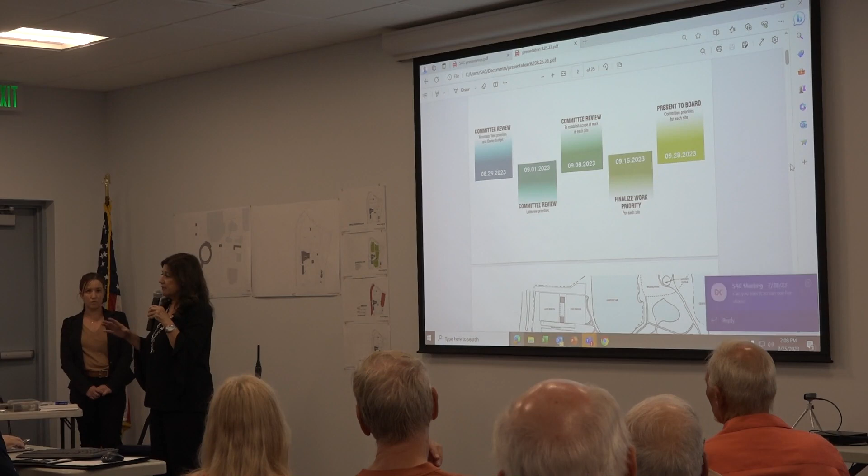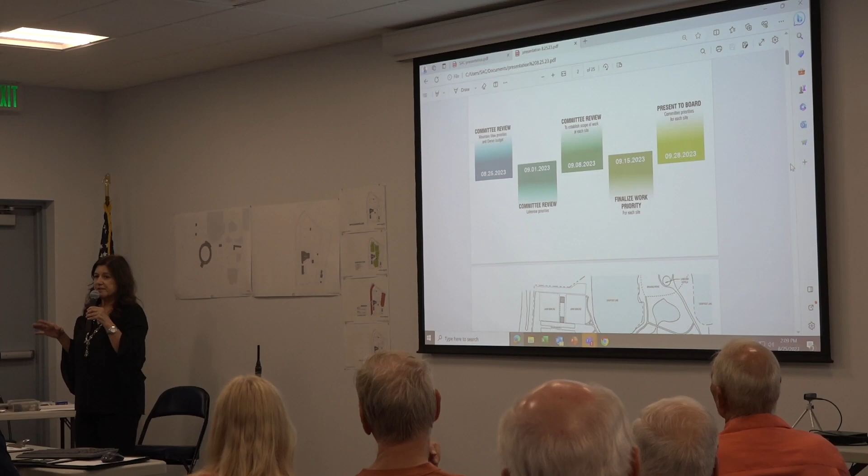Okay, so what we're going to do, this is an expedited process, folks. We have 2 different sites we're going to look at in terms of what wants to be done at each site in terms of the activities. There's going to be a wide range of potential for each. We've been asked to provide an overall site use plan that could show diagrammatically how the site could be modified, so then we can go to the board and see if there's an agreement to proceed in a particular direction. So today, we're going to go through briefly the 2 sites and then focus today on Mountain View. Next week, we'll be focusing on Lakeview in terms of alternatives and potential direction. Then the following week, we will come together to decide amongst them what is the priorities that can be done at each site that provide what you want and you're comfortable with assigning to a particular site or to both sites, okay? The idea would be then we'll do some general budget numbers, so then we will go with a preliminary site use diagram to the board on the 28th to see if there's consensus about an overall direction for just basic site use definition. Okay, so with that, what I'd like to know is, do any of you have any questions on that process?

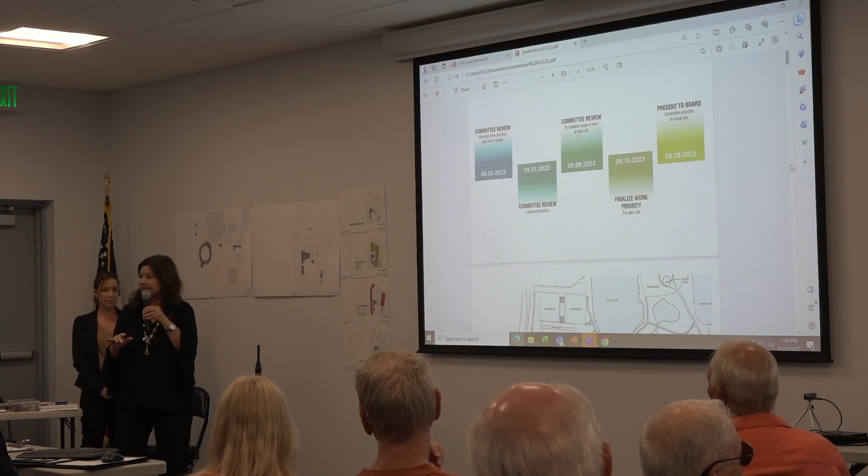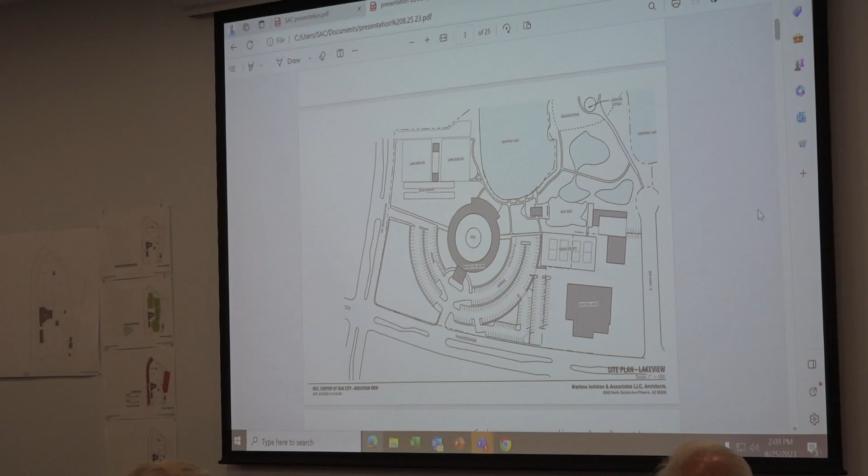Okay, so this is Lakeview, obviously, and what we're doing is we've done a preliminary evaluation of the buildings in square footage. I'll just tell you in general, there's not an issue with overall parking accommodation or anything on either site, so I'm not going to go into that in any detail today, okay? Next slide. So Lakeview has these primary outdoor activity spaces, as you know: swimming, tennis, shuffleboard, lawn bowling, and mini golf. Next.

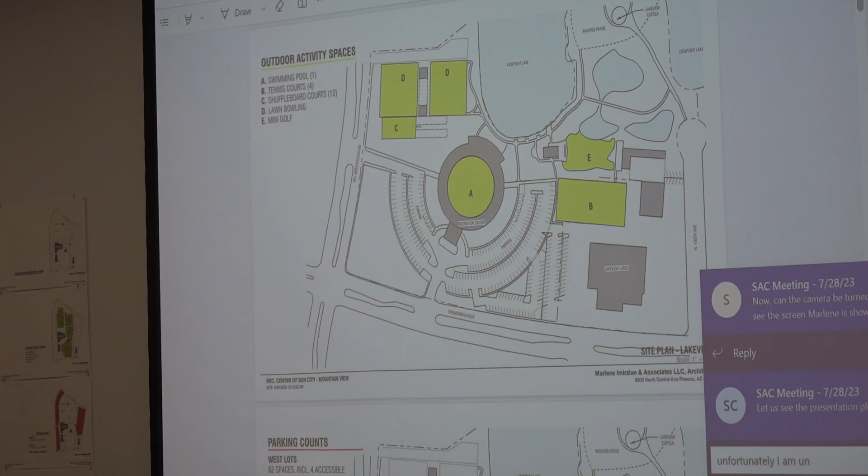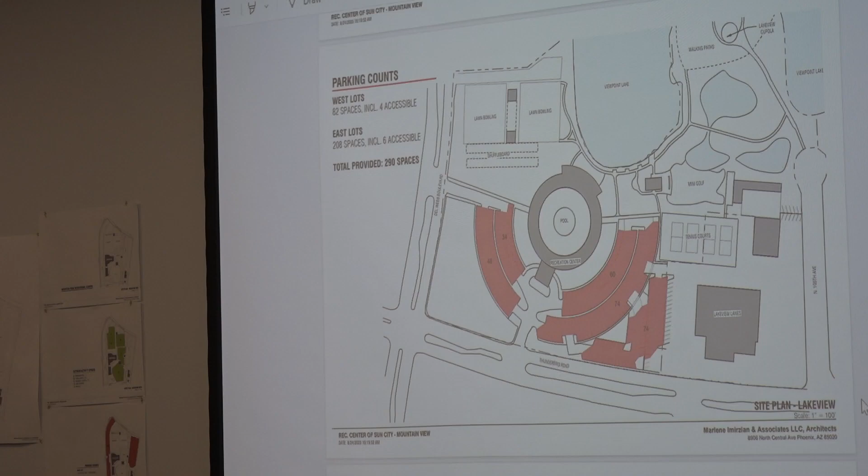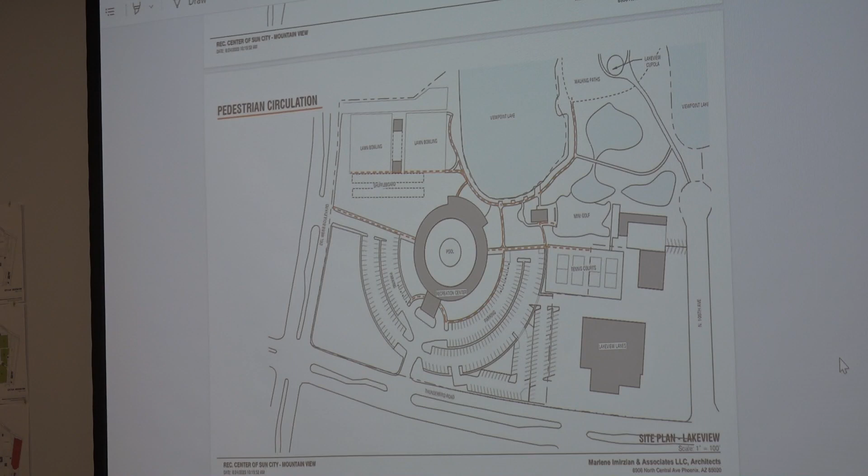The pedestrian circulation is fairly clear, and one of the best features here is Viewpoint Lake, which right now probably isn't optimized. It's a really fantastic place. When I went there I was saying, wow, we could do so much with this, and even some minor new construction would do a lot to really optimize that wonderful site.

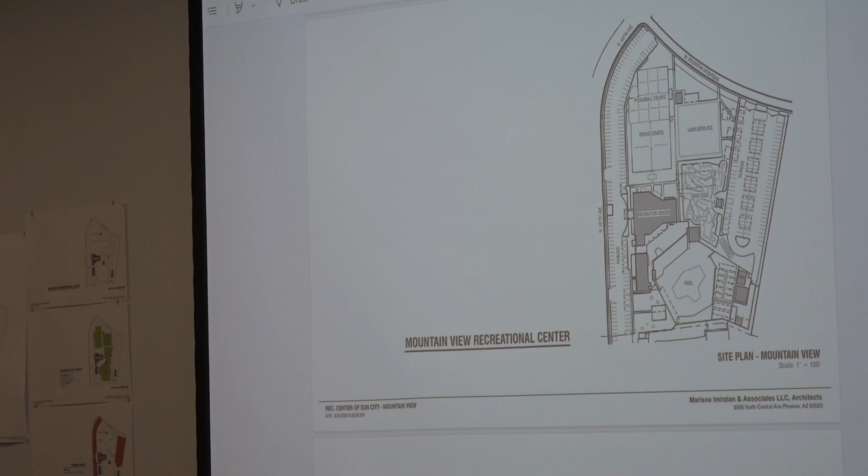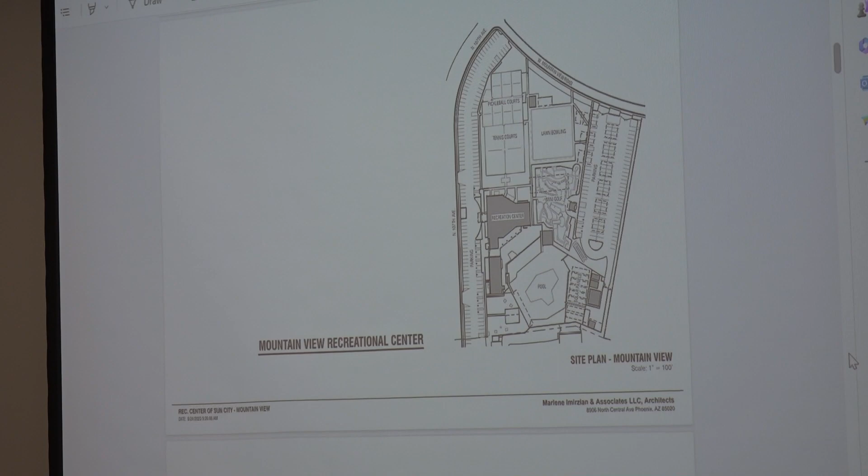Mountain View is one of the smaller sites, and it's pretty much fully utilized. Here you see the primary buildings, the two buildings in the auditorium shape, and then the area with the fitness and the restrooms.

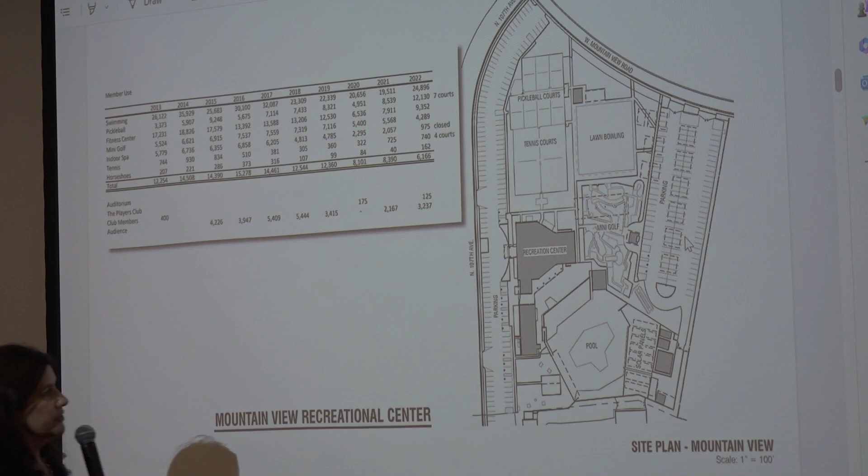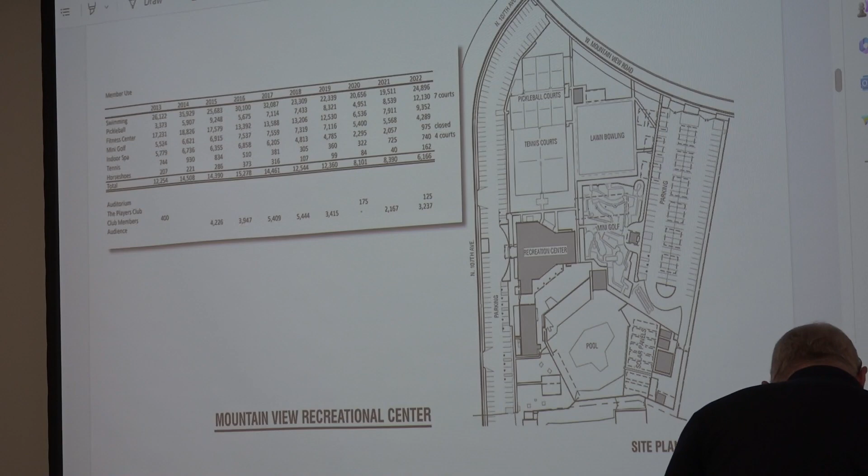Can you make the screen bigger, or make the image bigger? Thank you. Okay, so these are the two primary sections. I don't have a laser yet. Somebody does, you will shortly, they can figure out how to turn it on. I actually don't mind pointing, if you guys don't mind that weird light in my face.

So here are the two primary buildings. For a site of this size and this activity, there's a relatively small area for the restrooms and showers, and for the fitness area.

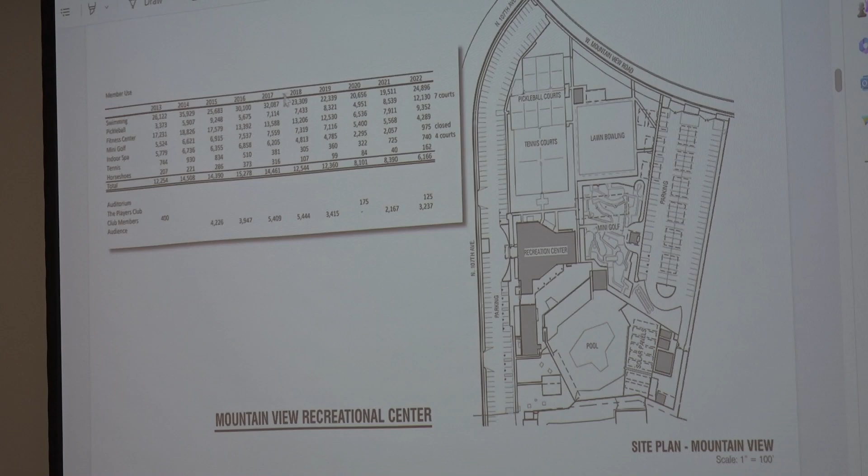Let's go to the next slide. There you go, this button there. Yeah, I know, sorry guys, it's the best I can do.

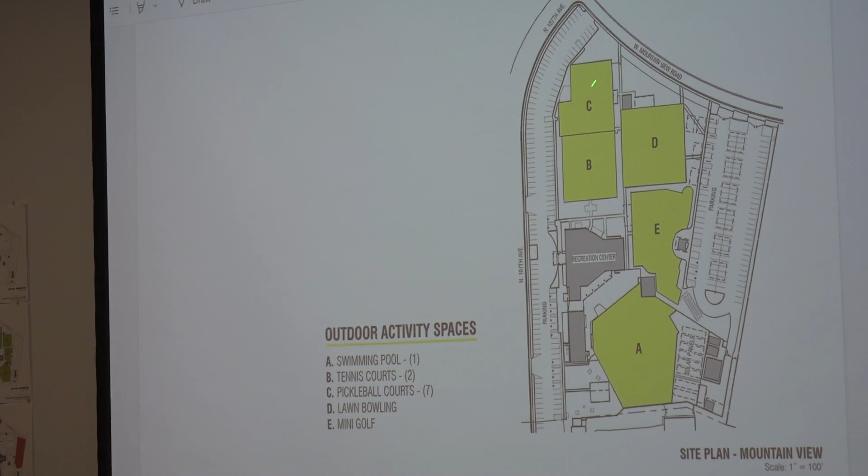Outdoor activity areas are primary at this site. There is swimming, a very generous pool area around it, the tennis courts which are B here, pickleball courts, lawn bowling, and mini golf.

Parking on the perimeter allows for that central focus for all the activities, which is actually pretty nice, so you're not crossing parking to connect to different activities.

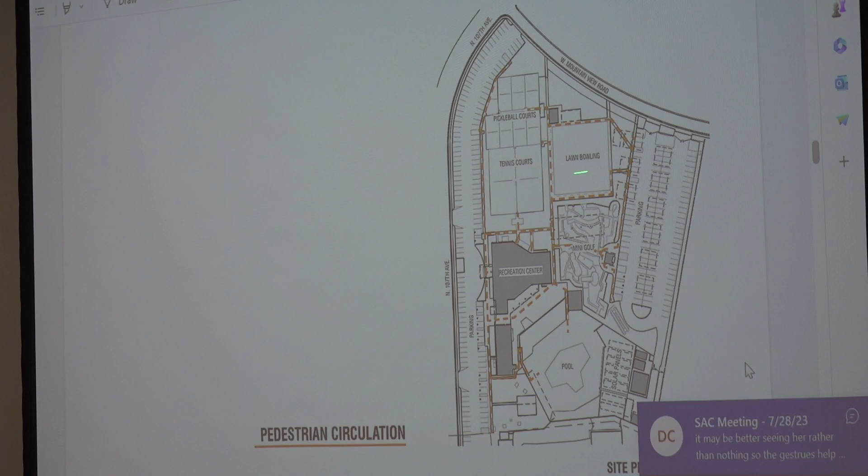The circulation, this is the main front entryway, is fairly clear. There are some areas here that I think have a lot of potential right now, but they're fairly open and not very well developed. So there's a lot of potential even with what you've got right now at Mountain View.

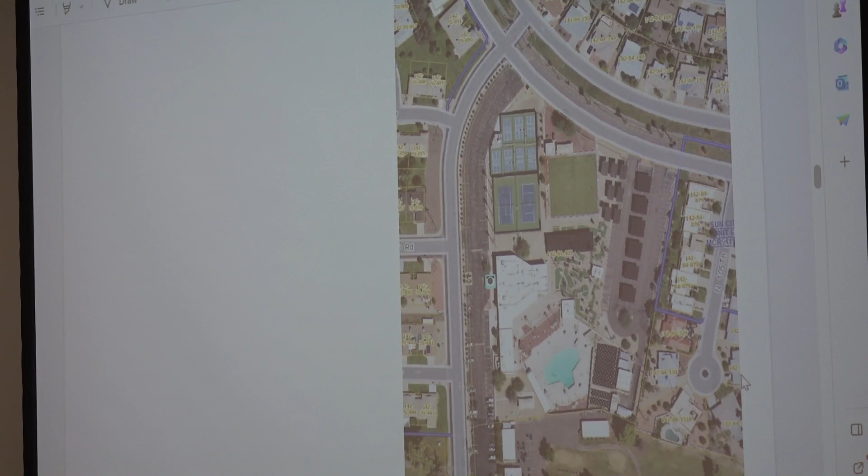Here's Mountain View overall, and here's the view of the buildings.

So like I said, today we're going to focus on Mountain View and see if we can establish what priorities could fit and work optimally at Mountain View. What I'm starting with right now is your existing buildings. Who loves this building?

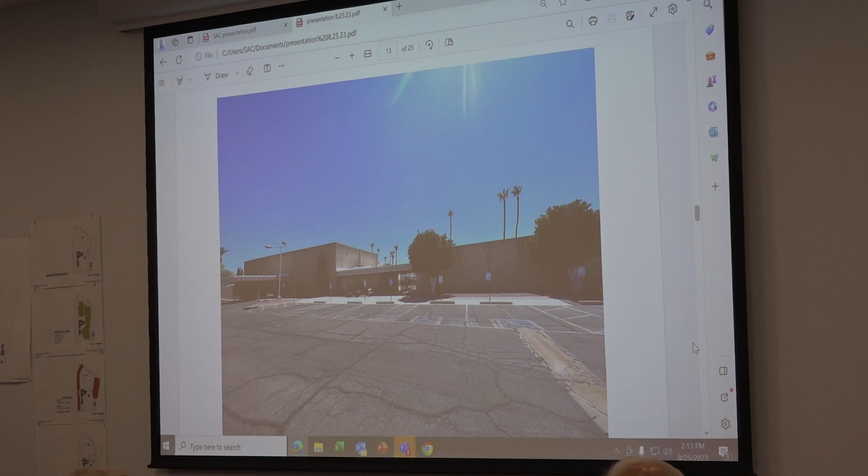If we kind of fix it a little bit, tell me what you like the most about this building. I love the architecture of it and the history and quality of Sun City. Okay, so it's like a historic element.

So would you be open to adjusting it for current uses and to optimize it in terms of some daylighting and alternatives? Sure, as long as you kind of kept the feeling of the building.

Like a little geometric—can you speak up? As long as, architecturally, when you pull up you see the entranceway and all the little shapes and structures of the building—to me it speaks to the history of Sun City. So if you could maintain some of that, where maybe you came through it and opened to a courtyard or whatever, I wouldn't be opposed to it, but the idea of just tearing that whole building down doesn't work for me.

Since the microphone is here, I don't have a particular fondness for the shape of the building or the historical element, but I think I'd like to see it potentially refreshed and renewed and used rather than torn down.

My perspective is one of the best things we can do overall is to keep an existing building and see if modifications can be done to optimize how it works, while still doing a major upgrade that can look different but respect the history of the location. That's very common in our practice, and we have a lot of past projects with old sites and buildings. Part of what we show is how we can optimize what's there, potentially rebuild portions, but not start over.

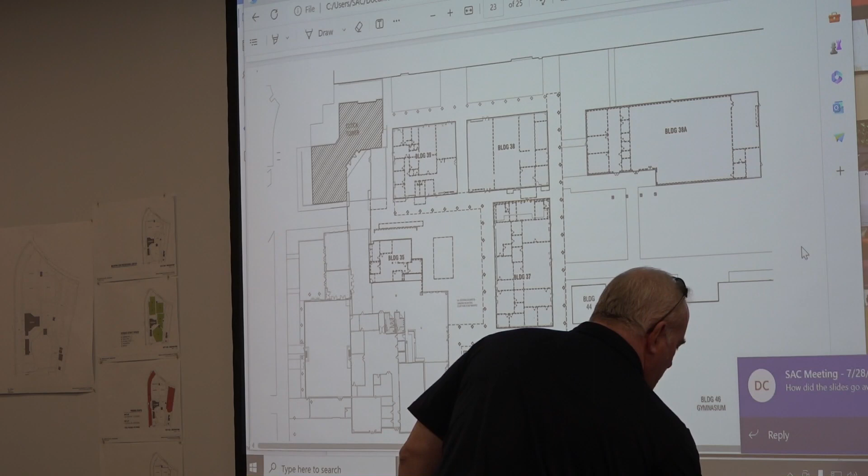Okay, next. Okay, can you go to the next slide? I want to talk about something else before we go to that slide about what you want. Sometimes people wonder, okay, what can you really do with an older building? Can you really update it? Steve, here, I'll hold it - you need to come over here so they can see the slides still.

This is a very complicated existing building at a community college here in Arizona, Mesa Community College. It is 7 buildings. They had very little budget. They had a lot of small, tight spaces that functioned very poorly. There was a lot of problems with shared spaces and collaboration. I'm only showing this quickly as an example of how you can go in and evaluate what we can do with existing land and space, and improve how it works in a cost-effective manner that optimizes how you work.

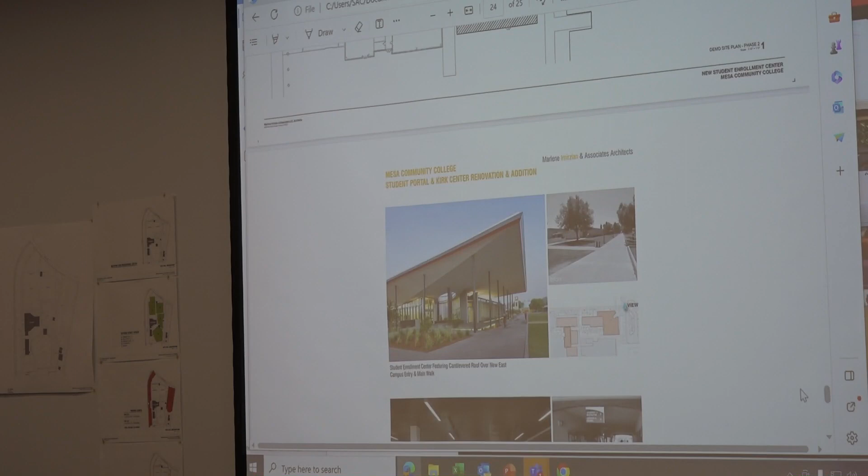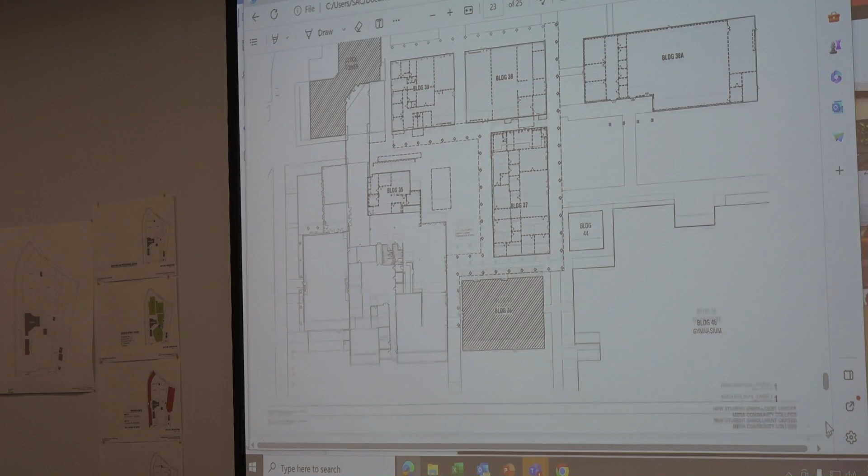Okay, next. So, actually go back one. What I want to say is these are all the existing buildings, all masonry, and there were these exterior courts. There was no real visual way that you could see where you're going to go into. All these areas were highly closed in and not of a size that could be used very well between the functions. This is for the student center, gathering space, study spaces, etc. at Mesa Community College. You know about that? Okay, next. Okay, so just a couple things to show.

Here's the site plan with the area of it. Part of what we did is at the very front, we made the new entrance and student center with a visible welcoming element that creates the main visual entry point to the campus from the parking lot, where there was none.

This is what it looked like before. When you came to the campus before, it didn't really look like you were entering the campus—it looked like you were at the back door. So the idea was, how do we create a welcoming place? Keep in mind, nothing here is saying we want to do this for your project. I'm just giving you a quick example of a very difficult, low-budget project, with existing buildings and very limited new construction.

This is how the buildings looked when we went there—small masonry buildings closed in with some exterior circulation between them. What we did, very economically, was open that all up with a whole new connection point. So now what used to be two small buildings is one more flexible building with a much better ceiling space, and all new utilities, services, electric, and communication.

Next. Next—it's the same one, huh? That's it, we're at the end. Oh, that's the last one. Okay, so just a couple examples.

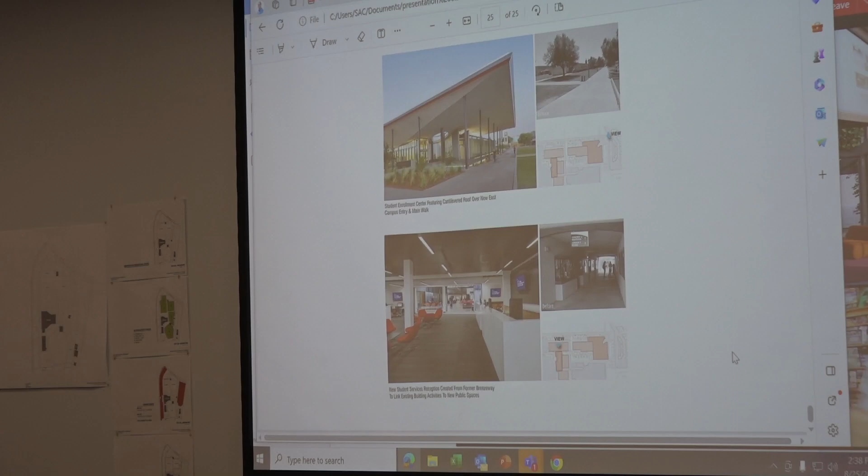So we have a lot of experience with existing campuses. Let's go and start now in one of our conversations about what we'd like to do. Can we go two slides up?

Okay, so we've been told these are kind of the numbers about what's happening right now on campus. Before I go further, based on what I've said so far, does anybody want to make a comment or suggestion about what we've talked about?

Yes? How would you go about establishing that the building can be renovated? It can be renovated? Yes, you know—yes, okay, so here's the thing, folks.

There are three key elements—I didn't bring those in. Anyway, structure and systems. Right now we would do an actual full structural evaluation of each building before we tell you for sure everything is fine. We have walked the buildings in general, and there's no evidence of structural failure.

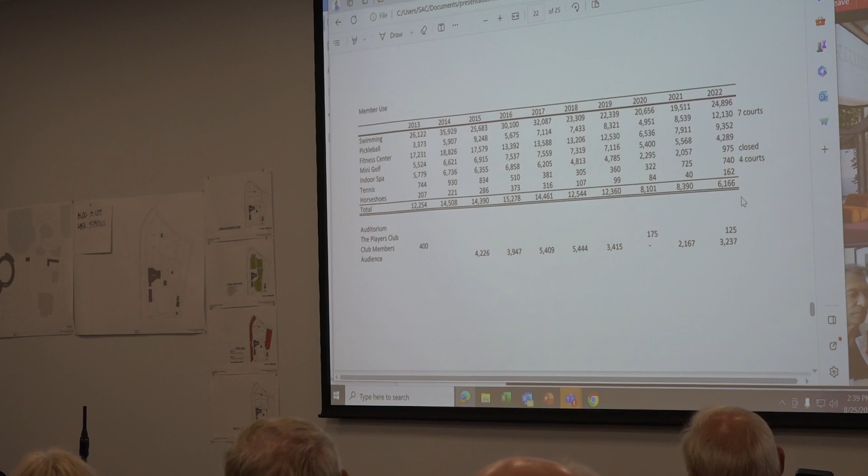Folks, that's the first thing we want to look at—are we even talking about something that's worth saving at all? That's number one. And even if a building is worth saving, if the dimensions, proportions, and use are just not of a size that merits saving and compromising how you might build new, that's also something we would not recommend. Right now, that second building is quite small and quite problematic in terms of proportions, services, and uses.

Yes? I just have one question—on the main auditorium, we were told it had asbestos in it and was probably just not worth saving. Can you address that? Is that part of this, the structure question? Okay, so asbestos abatement is very common in every building of this period. That is not a predeterminant for not doing it—you empty the building, get a whole team together, and get rid of it one time.

Okay, thank you. How about the flat roof—is it in condition that it should be saved, or would you rip that out? So I haven't been on the roof, but we would go up and see what the condition is. Are you having evidence of leaks from the roof right now? Yes, from the auditorium roof. What happens a lot with roofs is there's poor overall maintenance and upkeep in terms of the roof's condition. Usually, unless there is a structural problem, that's fairly easy to adjust—it's one of the key things we'd need to evaluate at the beginning to see the condition. Did that answer your question?

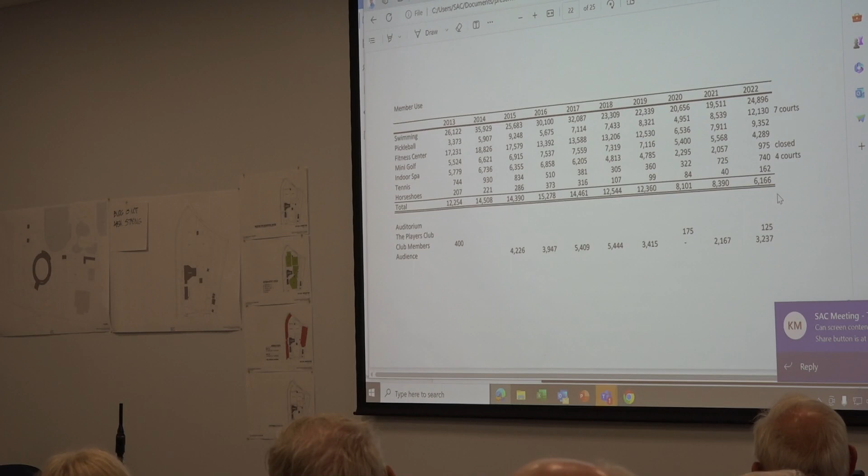Not as existing. I did see that, thank you. Okay, can't do it? No. Thank you. What's the problem?

Okay, regarding the 'not as existing,' what does that mean to you? We as a committee had voted earlier about Mountain View, where 2 pools would be. There were options presented, and we wanted a resort pool and a sports pool that would accommodate volleyball and accommodate lanes.

I think that's what the committee had accepted and agreed upon before. Presented. Okay, so what I heard is swimming is a priority with 2 main functions. Is that correct? Did I get it right?

Yes, and to add to that, the large pool would also be for aqua fitness. We have a huge amount of attendance for aqua fitness, that's why the pool dimensions would be important. Is that the sport size or the resort size? No, it'd be the resort one, for aqua fitness. There were 3 pools before, not 2.

That's what I was going to bring up, but also we would need bars on the pools because some of our classes involve holding on to the bars. No problem, yeah.

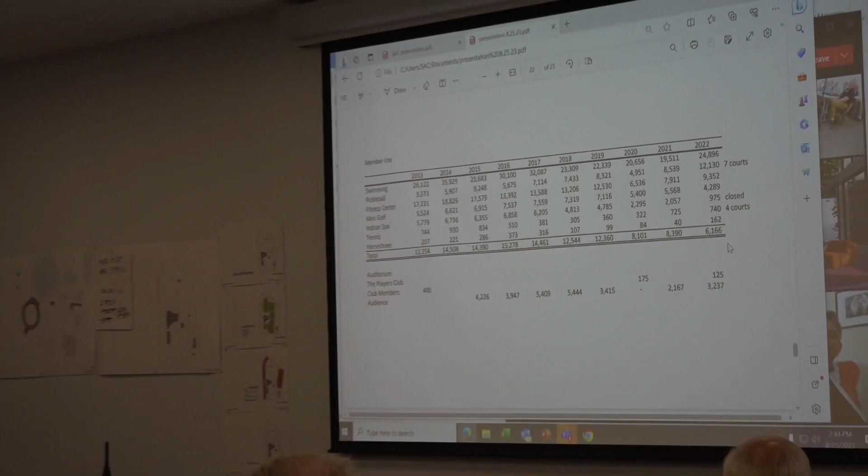Okay, and then what are the things you wanted to add at Oakmont? We'd like some shaded areas, or maybe some kind of sunscreen, because the sun's a problem certain times of the year given the way the courts are situated.

The courts are situated about as best as they can be when you consider the year-round factor of the sun. Okay. But if we had some shaded areas, some patio furniture, some storage, little things like that, because it's got the jacuzzi, the locker rooms right there, and an auditorium. It's a nice little place, and the people that work there are fantastic.

And I'm not saying they're not fantastic anywhere else, it's just that we love being there. Yes, you can check this up there.

The multi-purpose auditorium will cover volleyball, basketball, pickleball, and a fitness area inside. It'll cover a lot of different clubs, not just one, which it should not be used for. No, nothing should be used for just one club.

Okay, do you mind if I go one by one? Please. Okay, yes. Where we got down to 2 pools was because the lap swimmers didn't have a regulation lap pool - the pools they have have curved ends, or aren't the right depth, or whatever.

So we said, okay, we can do the lap pool, maybe 2 or 3 lanes, but that pool should also be constructed in a way that if water volleyball explodes, it could be used as a water volleyball pool as well. That's how we got to 2 pools. Does that make sense?

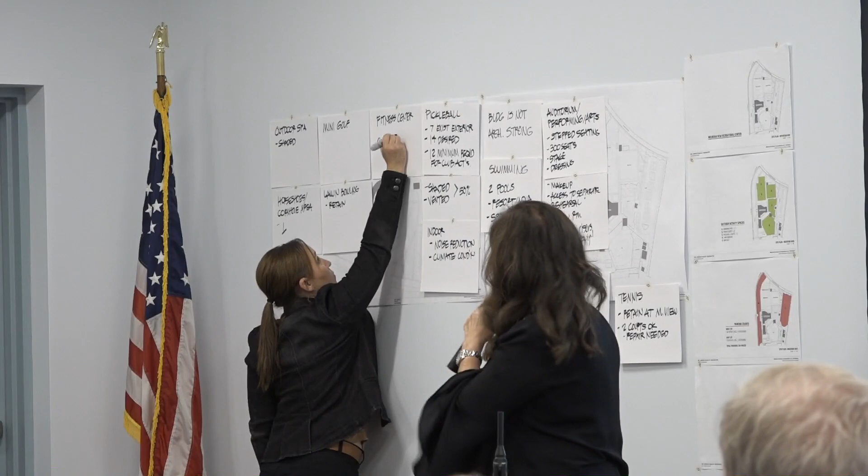Okay, just to give you a sense of scale. Would it be about the size of this room? It'll be bigger than this, proportionally this is too narrow, so the proportions and stuff are also very important. Okay, about double.

I think we decided there's no pickleball, right? I can't resist, I shouldn't do that, but okay. So you're going to do it on the softball. Pickleball, we're going to do, and we're going to look at 12 minimum. Then when we look at the spacing, it will allow for structure to be around it, so the site placement would allow for that to be done. And then if we're thinking about structure, we also have to think about the areas around it, so that we're allowing for clearances if we need to for code, okay?

The other thing about once we build a structure, then parking is required, okay? Right now you've got some good parking proportions, but once we take a look at what we're adding, we'll take a look at what the impact is.

Swimming, yes, two pools, a resort fitness pool and a sport pool with lane and sport capability. The other ones are just characteristics of those two pools, not another pool. There's potential for shade, and a potential for a 3-lane lap pool as part of one of those two pools, the sport lane and sport pool. Make sense? It's an aqua fitness.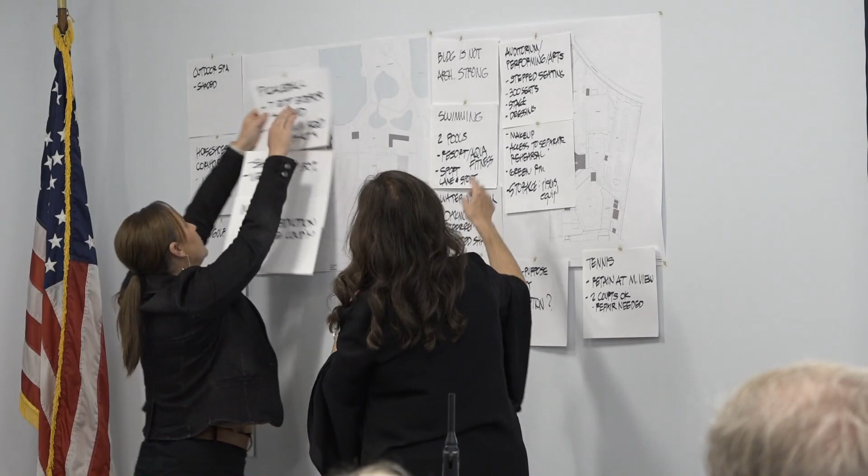Okay, and then I got the sense that swimming with 2 pools, we'll have to decide size of these, okay? Yep. But that existing pool is not going to remain, correct? Why not? Yeah, it's too- okay, I'll look at it, but proportionally it didn't look good for what you're talking about, that's the only reason. The shape and wasted space.

So the thing is, once you go in a pool and change the shape, it's almost like you better start over. It's a lot of money to recut it, sure is, but we can take a look at it, okay? And then, this is out.

And 2 tennis courts, we agree? Yes. Okay, so now, it appears to me that performing arts being able to be done at this site, is that a priority that's agreed upon amongst you all?

Absolutely, yes. Okay, can we consider this within the existing building? Yes, it can be done. I don't see how, but it's a miracle. With that 1999... Diane was saying she could maybe focus it.

Yes, it would be, if they decide not to do the Performing Arts Center there and have to do it over at Lakeview, if they would put the wood floor in there, that would help immensely. That would take care of times when we cannot get sundial because of the sun bowl. If they get moved from the sun bowl for weather, they get moved over to sundial.